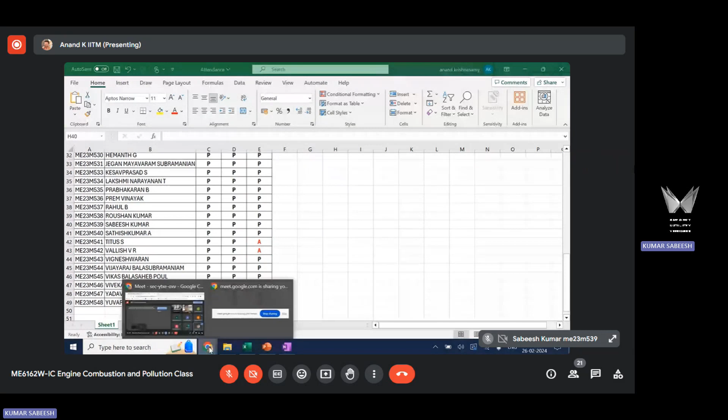Okay, Titus and Vallish are absent today. I hope they don't have any problem with the audio. They are not here. Okay. As I informed you, it's always better to inform me if you are taking any leave, for my record, so it's easy for me to follow up with you. That's one thing. And second, the remaining materials for chapter 2, I have sent to you today.

So you know Saturday you have your quiz 1 exam. For quiz 1, the people here in Chennai are going to come to IIT Madras. The venue for the exam is Diesel Hall in IC Engines Laboratory. The exam starts by 10 o'clock, and it will be for 50 minutes.

The questions will be asked for 30 marks. You have to answer all the questions, there are no choices. Come with your calculator for the exam, it is required. Chapter 1 questions will be based on the concepts and theory discussed in class. Chapter 2 will be problem based, so come with your calculator.

So it is for 30 marks, 50 minutes is the timeline. You have to answer all the questions in 50 minutes. In a relative grading system, generally the way we filter out S and A grade people is you have to respond quickly. That depends on the time and effort you put in to prepare for the exam. If you spend time for the exam preparation, it will show up. There is no other way.

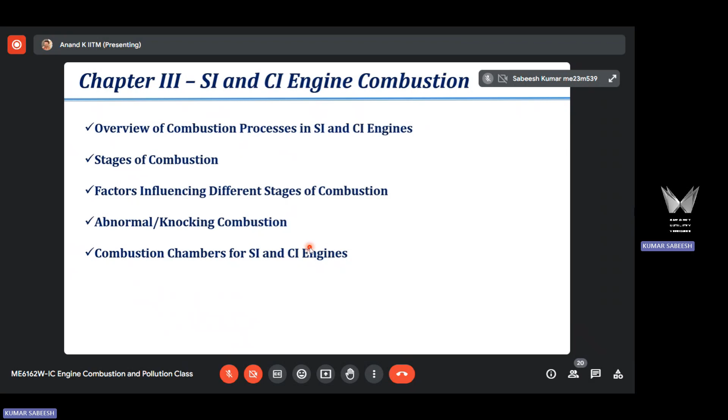So I'll start with the overview here, overview of spark ignited engine combustion. This combustion event affects the performance and pollutant emission.

When we do research on engine, we have only two targets. One is engine performance improvement, that is, we want to achieve the desired power and torque output with minimal fuel consumption. As an end user of a vehicle, one always worries about the mileage it gives. The consumption of fuel is of primary importance for the end user. So you need to ensure the engine is performing well in terms of producing the desired rated power output with minimal fuel consumption.

We also want to ensure that the pollutants emitted from the engine are minimal. Otherwise, you cannot sell the vehicle as an engine OEM. This is a legal requirement, pollutants need to be reduced below the current legal limits. So we always have this two targets, performance improvement and pollutant reduction.

To achieve this, we need to handle and control this combustion event effectively. Ignition timing is the time at which combustion gets started, and the other one is combustion phasing. Combustion phasing refers to how well you are placing the combustion event with respect to the engine operating cycle. For one engine operating cycle, there is a finite duration, and this finite duration depends on the engine running speed.

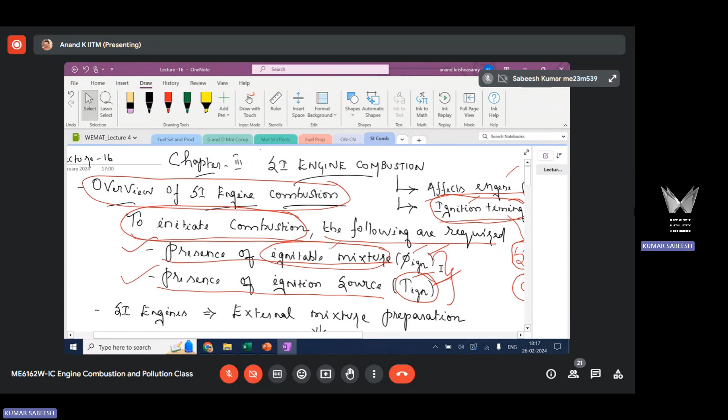That is how the combustion event gets initiated both in SI engine as well as in a CI engine. Now coming back to spark ignited engine, which is our focus now, and then we will move on to CI engine combustion. In spark ignited engine, when you talk about mixture preparation, I need to have an ignitable mixture, right? How am I getting this ignitable mixture?

The strategy adopted in SI engine to prepare an ignitable mixture is referred to as external mixture preparation. What is external mixture preparation?

Fuel and air are prepared outside the engine cylinder. The ignitable fuel and air are prepared outside the engine cylinder. This is contrary to what we do in a diesel engine.

In a diesel engine, fuel and air are prepared inside the combustion chamber where the ignition or combustion is happening. That is referred to as internal mixture preparation. Here in a SI engine, fuel is introduced outside the engine, and fuel and air mixture is prepared outside the engine. That's why it is referred to as external mixture preparation.

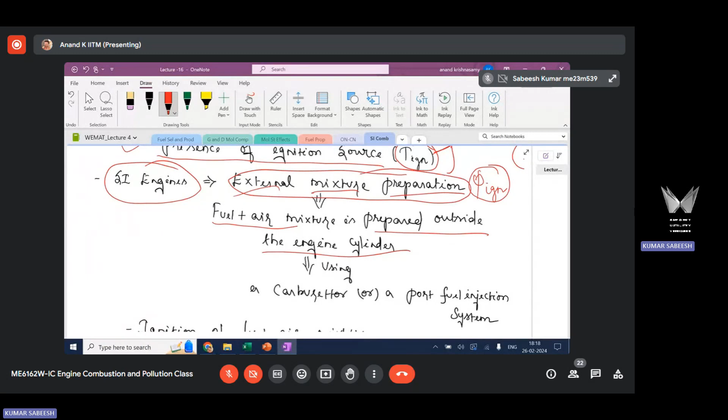How is this done? This is done using a device, either a carburetor, which is still used in very low cost SI engines, but is generally outdated now, or we mostly use a port fuel injection system to introduce or inject fuel into the engine intake system near the port. That's why it's called port fuel injection system. I'm not going into details of the engine system.

Our focus here is on the combustion process. So I will briefly discuss the systems used to prepare the mixture, just for the purpose of understanding the process. Carburetor is still used, but has very limited application, only for low cost engines. It's still used in some other engines, but mostly it's port fuel injection system where the fuel is sprayed near the intake port.

Near the intake port, the fuel is sprayed, and that is how it works. This is the intake port, or the region where the air-fuel mixture is entering into the engine cylinder. Here you have air coming in, inducted through the intake manifold. Port fuel injector is located here, and it sprays fuel over the intake port. It mixes with the incoming air, and the fuel and air mixture enters into the engine cylinder.

So the mixture is introduced outside the engine. Fuel is introduced outside the engine. The mixture of fuel and air is what is entering into the engine cylinder for ignition. That's why it's referred to as external mixture preparation.

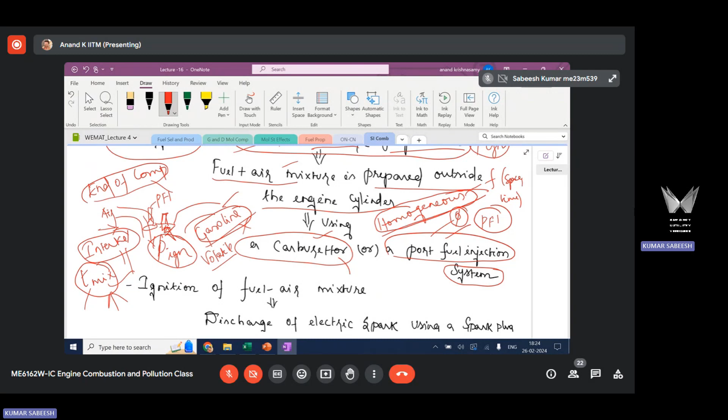So in the SI engine, because of the external mixture preparation based strategy, I end up forming a homogeneous fuel air mixture, which is not possible in a CI engine. That is how I get this ignitable mixture in a spark ignited engine. Using an appropriate device and external mixture preparation based strategy, I provide a homogeneous, ignitable fuel air mixture to the cylinder. Then how do I get the ignition source? That is point number 2.

Ignition source is provided by discharging electric spark. Discharging electric spark provides very high thermal energy, the ignition temperature. This helps in forming radicals to initiate the combustion event. I have a homogeneous mixture prepared through external mixture preparation strategy, and now I am discharging electric spark to this homogeneous mixture to initiate radical formation and start the combustion event.

That is how the combustion event gets started - I have a combination of these two in a SI engine. Once the spark is discharged and ignition happens, what will ultimately result is a flame. A flame will form around the spark plug region, and this flame has to be a stable flame. Otherwise, the combustion will get started but cannot continue or sustain.

So you need to ensure that the flame formed around the spark plug region is stable. Once you ensure that the flame is stable, then the stable flame will propagate across the combustion chamber and burn the unburned fuel air mixture that resides in the combustion chamber.

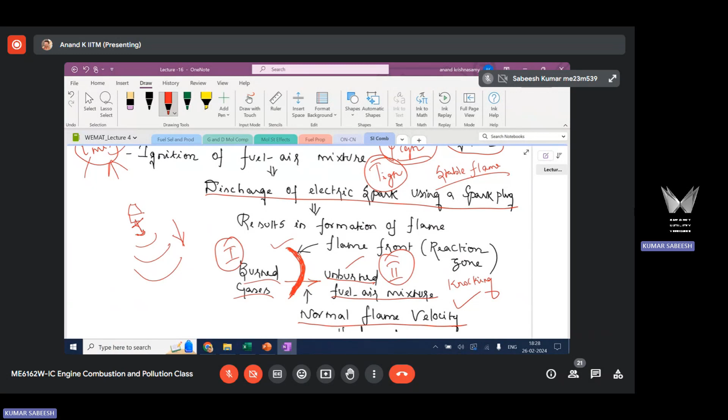Now, flame velocity depends on both physical process as well as chemical process. I have highlighted here what these physical processes are, and I have put a plus symbol meaning these two processes are coupled. You cannot separate one process from the other. These two are interlinked, coupled.

Physical process here refers to heat transfer from the flame zone or reaction zone. There are different modes of heat transfer. The predominant mode in IC engine combustion is radiation, because there is less time and the flame is at a very high temperature, due to which it radiates thermal energy from the flame zone to the unburned mixture. So there is a heat transfer.

There is also mass diffusion that happens due to concentration gradients. Between the burnt and unburned region, there is a concentration gradient that helps in mass diffusion between these two regions. Any concentration gradient results in mass diffusion according to Fick's laws. So there is mass transfer that also happens during this period of time, which is a physical process.

The third one is fluid dynamics. The fluid dynamics in the combustion chamber is also a physical process, referring to how quickly the flame moves with respect to the design of the combustion chamber. We are going to discuss this in the last part of this chapter, seeing how combustion chamber design affects flame movement. Again, it's a physical process.

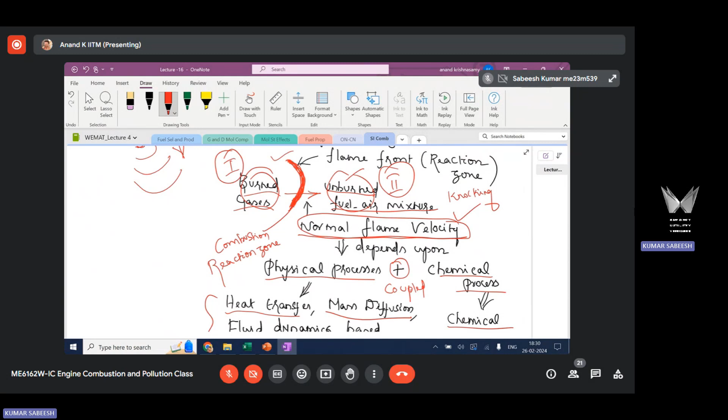The rate of combustion is governed by kinetics, as we already discussed previously in chapter 2. The kinetic rate is dependent on the molecular composition of the fuel. So this is primarily dependent on fuel molecular composition.

So there is a physical process and a chemical process, and these two are combined because the rate at which heat transfer happens affects the rate at which kinetics happen, since kinetic rate is highly sensitive to temperature, and heat transfer affects temperature. Mass diffusion affects mixing of fuel and air between the two zones, which again affects the chemical kinetics. And design of the combustion chamber affects flame movement. The flame velocity also affects the rate of combustion.

These two are intercoupled because kinetics also, the thermal energy released during combustion, since it's an exothermic process, the temperature will start to rise. With the increase in temperature, heat transfer also increases. You could see that these two processes are coupled. That is how the flame is moving inside the combustion chamber of the SI engine, and that is what affects the progress of combustion. So we can say that the overall combustion event in an SI engine is a flame propagation based combustion event.

Flame propagation based combustion event, based on which the thermal energy release is happening, meaning the rate at which thermal energy is released is dependent on normal flame velocity, which in turn depends on physical as well as chemical processes. So this is how a combustion event happens, and it will continue as long as you have a stable flame. Once the flame gets quenched, the combustion event will stop.

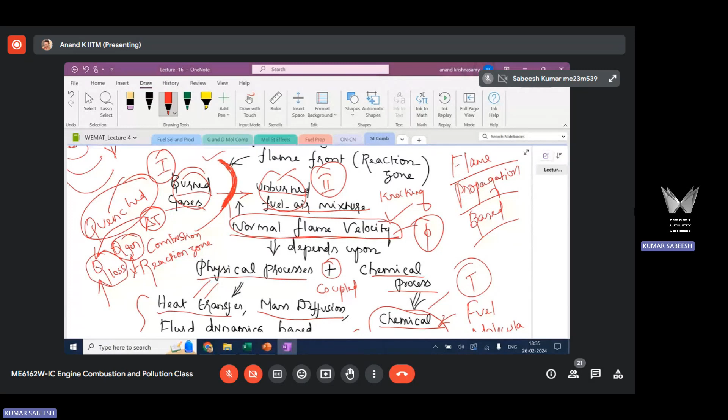That is the condition, the quench condition, for the end of combustion. The flame cannot sustain after some time because of higher heat loss. So this is how the combustion event happens in a spark ignited engine. This is an overview of the combustion event.

Now we are going to discuss the stages of combustion. We characterize the combustion event in terms of a number of stages. The purpose here is to control the combustion event after characterizing it. Now let us look at the stages of the combustion event.

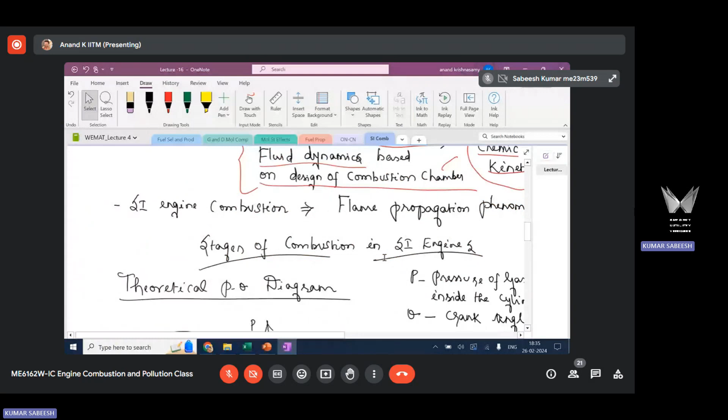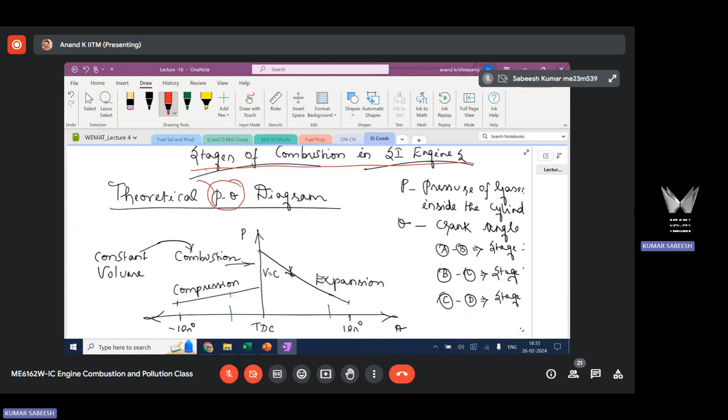This stages of the combustion event is explained with the help of the pressure crank angle diagram. In shorter form, it is called the P theta diagram. P is pressure, gas pressure inside the cylinder, and theta is crankshaft angular position.

Can anyone tell me why we are not analyzing the combustion event with respect to absolute time? I said that this is an indicator of time. So we are analyzing how the pressure in the cylinder varies with respect to time, in terms of crank angle.

Combustion is always defined with respect to the piston, and since it's invariant of the RPM, engine running speed, that is fine.

You could see that pressure is on the y-axis and the crank angle, theta, is on the x-axis. TDC point is compression TDC, angle is 0 degree. On the left side, you always indicate with a negative sign, minus 180 degree. On the right side, you indicate with a positive sign, plus 180 degree. This is a standard nomenclature.

This is the region where combustion is happening, that's why this is a reference point. TDC is a reference point, and the piston reaches TDC twice in an engine cycle, but we consider compression TDC as the reference, not the other TDC, because that is the region where combustion happens. From the perspective of analyzing the combustion event, compression TDC plays a significant role. That's why this is taken as the reference point, and at that point it is considered 0 degree.

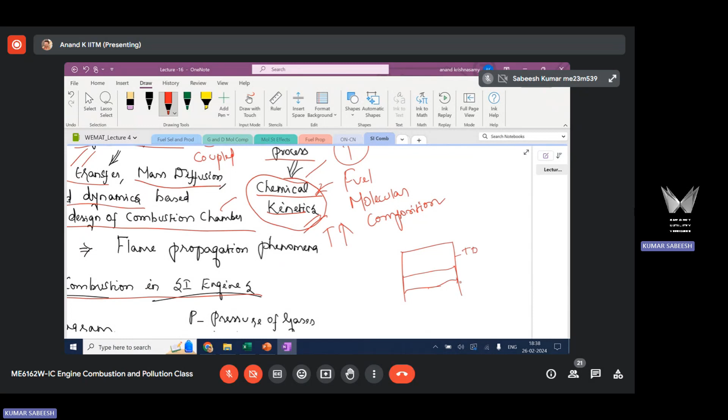Let us say the piston is moving up during the compression process. You have the piston here, and at any instantaneous position, say X. Then you have a connecting rod and crank here. So this is the angle we are talking about, crankshaft angular position theta, and there is a linear piston position X. For any theta, theta and X are interrelated through the slider-crank relation.

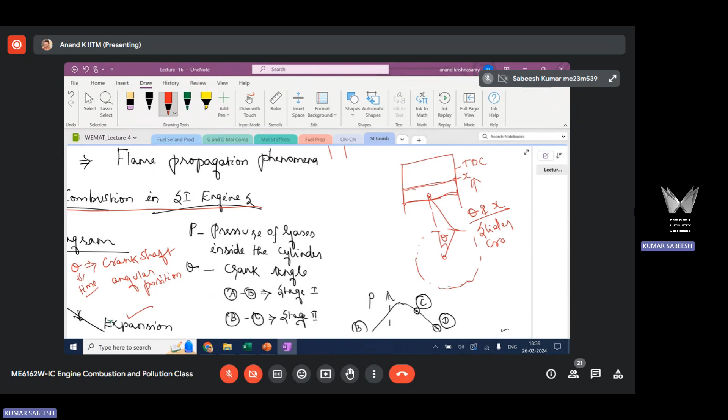Because it's a reciprocating engine, the piston reciprocates, moving up and down, and the crank rotates. There is a relationship between this linear motion and rotary motion. That's why for each theta there is an associated X, meaning the instantaneous piston position. So we analyze time in terms of crankshaft angular position, because crankshaft angular position provides information about the piston's linear position in the cylinder. For any instantaneous theta, there is an instantaneous X.

So I am analyzing how the gas pressure varies in the cylinder with respect to the position of the piston. This is an important point. If you analyze pressure variation with respect to absolute time, it doesn't make sense because it completely misses the information related to piston position. Here, with theta, I am analyzing gas pressure variation with respect to piston position, because I need to know where the piston is at a particular magnitude of gas pressure.

For example, at the start of the expansion process, I need to ensure that I have maximum pressure there, then only can I recover maximum work. Otherwise it's of no use. If maximum pressure occurs during the compression stroke, I cannot recover that as useful work; it has to happen during the expansion stroke. That's why it becomes important to analyze how pressure varies with respect to piston position. That is the reason I always analyze combustion with respect to crankshaft angular position rather than absolute time, since absolute time completely misses the information related to piston position.

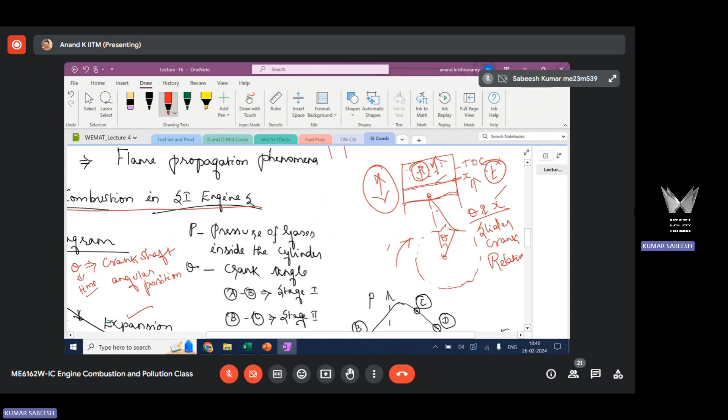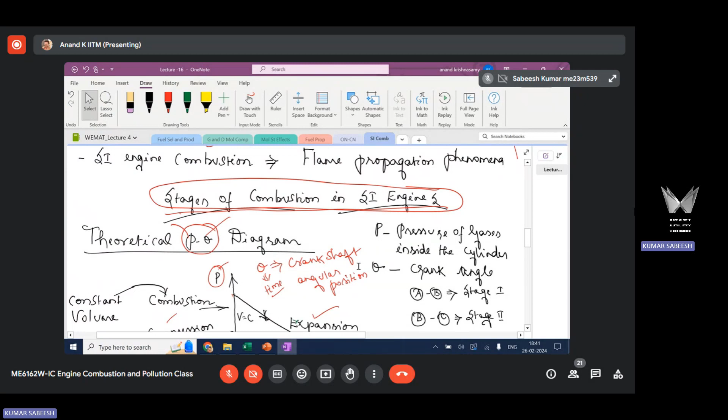Here we are going to discuss the different stages of combustion. Basically, we are characterizing the combustion event in terms of the stages it undergoes. First, let us start with the theoretical pressure-crank angle diagram.

In the theoretical pressure-crank angle diagram, you know SI engine combustion is a particular type of combustion event. As you have studied in thermodynamic cycles, SI engine combustion is modeled as constant volume combustion, so it's an Otto cycle. So here I have indicated this as a theoretical process: a theoretical pressure-crank angle diagram associated with constant volume combustion in an SI engine. The pressure-crank angle diagram is also called the pressure profile, and the pressure profile will look something like this.

You have a compression event, pressure increases, and then there is a combustion event, which is constant volume, meaning the entire combustion event occurs when the piston is at top dead center, compression TDC. So you have a vertical line here.

And during expansion, the piston is moving down, with TDC as my reference point. In the theoretical constant volume Otto cycle process, I'm assuming the entire combustion event happens when the piston is at compression TDC. So you have a vertical line here, with a sharp rise in pressure because there is an instantaneous energy release.

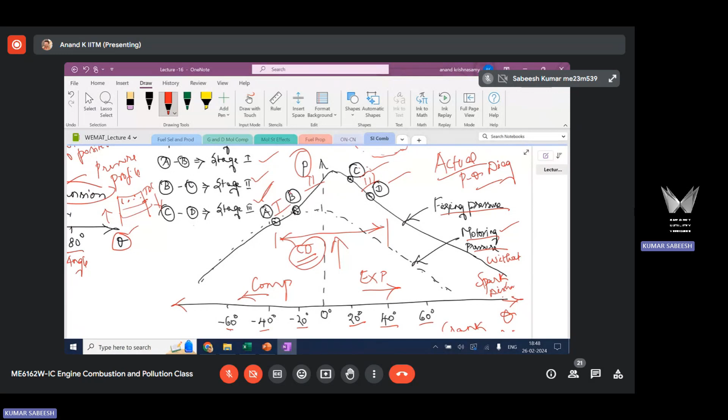What is this motoring pressure? It's when there is no ignition or spark provided, so the pressure profile is without spark. Without spark discharge, if you just compress, you will have a profile like this: there will be compression and expansion, but without firing, without combustion. That is what you get in the dotted line. That's the profile you get when you don't discharge an electric spark. When you discharge electric spark, this is the profile you get.

It is called the firing pressure profile, the P-theta diagram, indicated here in three distinct stages: AB, BC, and CD. So what are those three stages?

Stage 1 is referred to as the flame development period, the period required to form a stable flame. Note that it's not just about forming a flame — the flame formed during this period should be stable. Only then can the combustion event sustain; otherwise the combustion event will start but then stop.

That is called misfire. In an actual engine you've come across this term misfire — there are misfire cycles that happen, primarily because the flame generated cannot sustain. So you need to form a stable flame, and that happens during this first stage, which is why it's called the flame development period. It's also called ignition lag. Technically there is no ignition delay in an SI engine, but what we refer to here as ignition lag is the time required to form a stable flame.

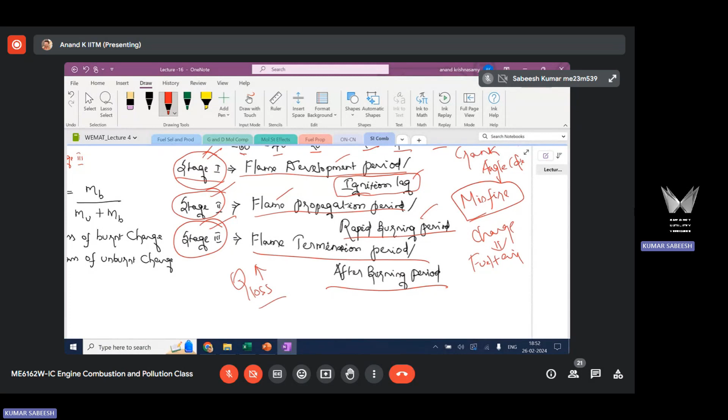That is the period where heat loss starts to increase significantly because the flame has reached the cooler regions of the combustion chamber. Eventually there's a stage where heat loss balances the heat released, and because of that the flame gets quenched or extinguished — marking the end of the combustion event. As long as there's a flame, there's combustion; once it's extinguished, there's no more combustion. This happens when the flame reaches the extreme corners or boundaries of the combustion chamber. That is how the actual combustion event happens in three stages in an SI engine.

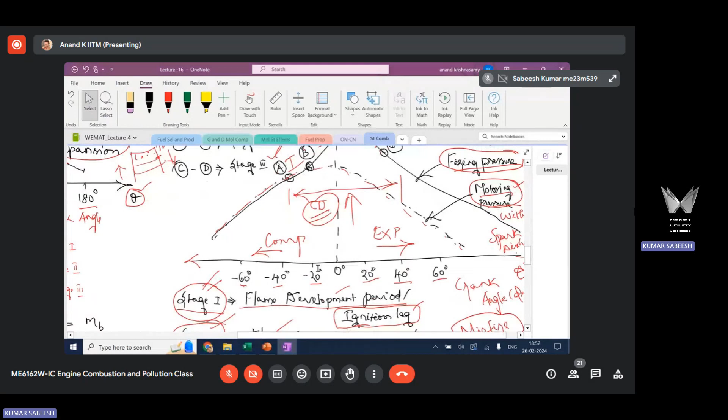I'll give more finer details about these three individual stages in the next class.

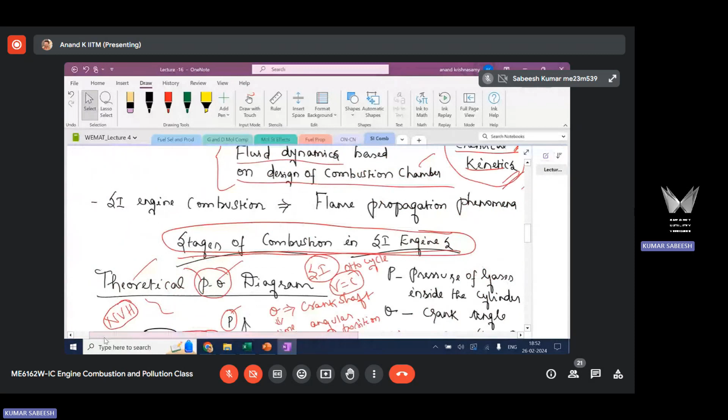So one question regarding ethanol blending on gasoline, sir. If we blend ethanol into gasoline, should we consider it like a catalytic polymerization where the alcohol will blend with the gasoline, or will it be two separate components and we have to write combustion equations separately?

No, the way combustion happens is with a blend, in proportion. So in an actual engine, if you blend gasoline and ethanol, you will have a blend, but you are mixing them only physically. There is no molecular interaction as such. When there is a chemical reaction, the molecular structure itself becomes different, but here it is physical mixing. So you have gasoline with one molecular structure, and ethanol with a different molecular structure, and these two are physically mixed using a stirrer or whatever.

Sometimes it is prone to phase separation because these two are immiscible. At higher ethanol concentrations, they will phase separate, especially when ethanol has water content. So it is just physical mixing; nothing happens at the chemical level. Energy release happens with the blend, but you can consider these two fuels as individual fuels that combine, since they are mixed physically, when you write the chemical equation.

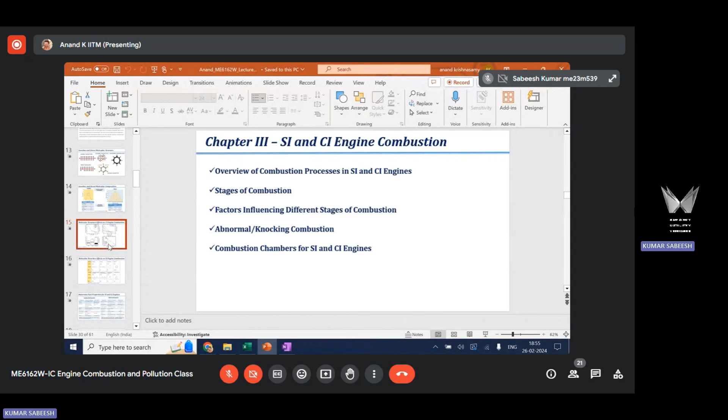Yes, this one. What is your doubt? I'm sorry, can we go to the previous slide also? Sorry. Okay, previous slide. There was another graph, I think, sir. Sorry, can we go to the previous slide? This one?

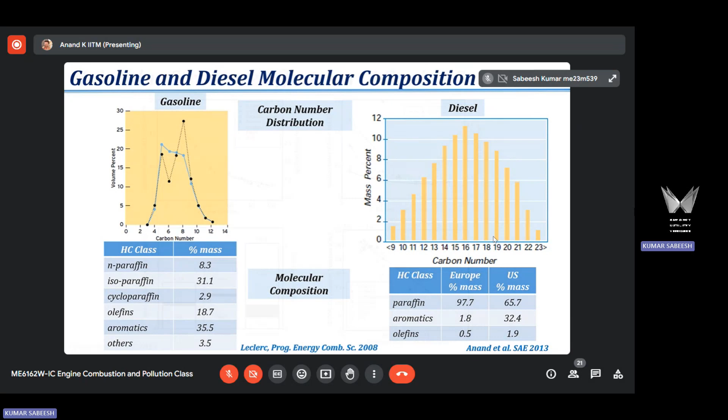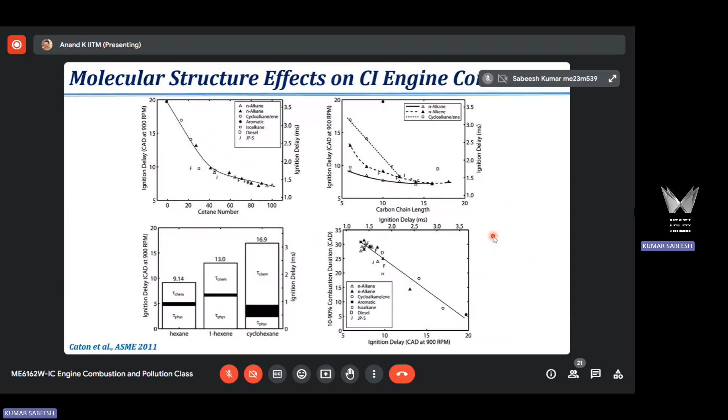Carburetor icing is primarily happening due to water getting into solid phase. When you inject air into the engine, air has some water vapor because of humidity. It depends on the humidity level. This is applicable only for Western countries, not for a country like India with tropical climate. In Western countries, when you inject air with water vapor, and the fuel vaporizes from liquid phase to gas phase - combustion is a gas phase phenomenon, but liquid phase fuel is what is introduced into the engine.

Once the liquid phase fuel gets converted to gas phase, it absorbs latent heat. As it absorbs latent heat, the temperature drops too low. If the intake temperature is too low, it may also lead to icing condition. So this is primarily because of thermal energy absorption, which may lead to icing if the initial temperature of the air is too low. This happens only in Western countries; in India we don't have this problem.

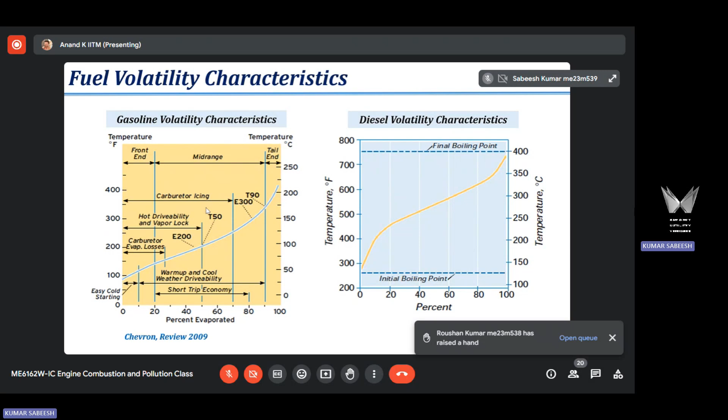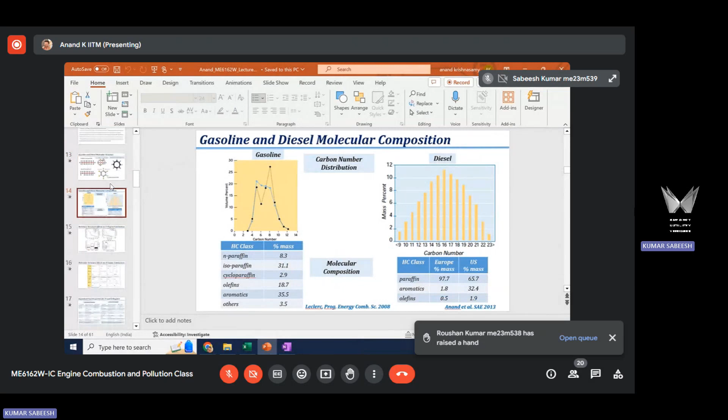Yeah, anything else? Sir, one question I want to ask. In the same slide, if you go to slide number 14 - oh no, 13, sir, 13. Okay, yes sir.

You have taught us that the cetane number of a fuel is dependent on how quickly it can form the radical, right sir? And you had also taught us that if the fuel composition has a ring structure, that is supposed to be more stable than the chain structure. Now here, cycloparaffin has a ring structure, whereas isoparaffin has a branch structure. So what I mean to say is you had told us something but we have missed the link - why is the cetane number of cycloparaffin, instead of having a ring structure, better than the branch structure?

No, branch structure is also unstable - I mean, branch structure apart from ring structure is also stable. That's why you have a very low cetane number. Okay, very low cetane number. So this is also a very stable structure, branch structure.

In fact, one of the important processes in the refinery to improve octane quality is catalytic reforming. If you remember, I said about that, right? Right, sir. In catalytic reforming, what they do is convert this chain into branch.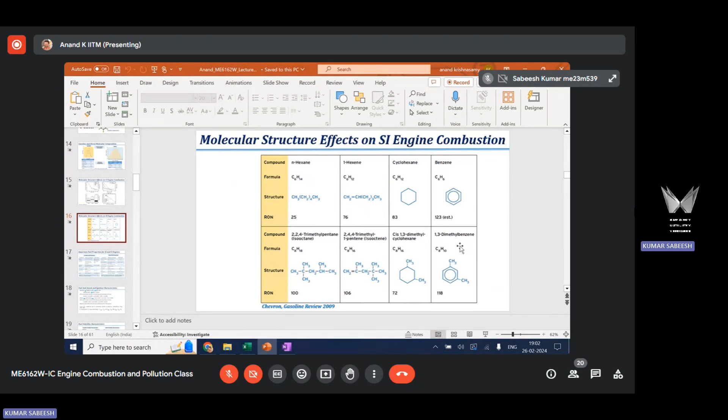And this may also have a lengthy side chain, as I have indicated during our discussion on octane. If we add a lengthy chain, that will further change the ignition quality. So what you need to take away from this is it gives you the direction of what will happen to ignition quality with respect to a particular structure. But in that particular structure also, there are n number of hydrocarbons that you need to understand - different carbon number and hydrogen number will also have an effect.

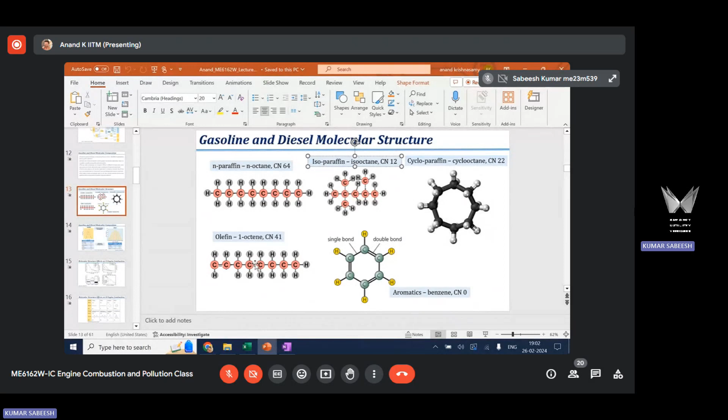Right, so just to add upon Mr. Roshan's comments and to summarize - if I have to arrange this in descending order, I can say N-paraffin, then olefins, then cycloparaffin, then isoparaffin, and lastly aromatics, correct? Yeah, this is what I have given here, right? I have already provided this.